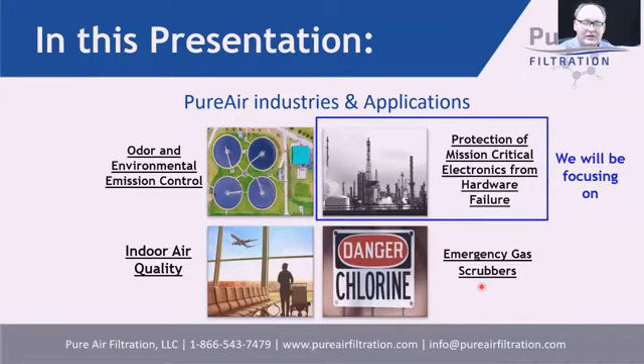I'll mention the other ones today: odor control and environmental emissions control. So this is mainly for wastewater treatment plants, but also for industrial or kitchen exhaust, preventing odors and gases from escaping areas, either for reducing complaints from neighbors or for environmental compliance.

Indoor air quality, that's protecting the air inside of buildings from gaseous contaminants. Typically airports, museums, where we're protecting precious works of art, and other applications, even just office buildings where you're looking to improve your air quality for personnel inside.

The last area I'll just generally mention is emergency gas scrubbers. So in this case, we provide standby systems, very, very low maintenance standby systems, which activate in the case of an emergency gas release and capture that gas and protect people and equipment from that. But today we're going to be speaking about protection of mission critical electronics from hardware failure. So let's jump right into that.

So one of our mottos here is Pure Air is a world leader in the removal of gases, odors, and vapors. And how do we do that? We do that through a technology referred to as gas phase filtration.

Everybody's hearing a lot of talk these days about filtration in regard to the whole COVID crisis. If you didn't know what a HEPA filter was before, you certainly know what it is now. And so filtration is certainly getting a lot of focus, and we're certainly enjoying a lot of that general focus on filtration, though we don't necessarily have specific things for viral control, at least yet. We do think that's something coming out soon.

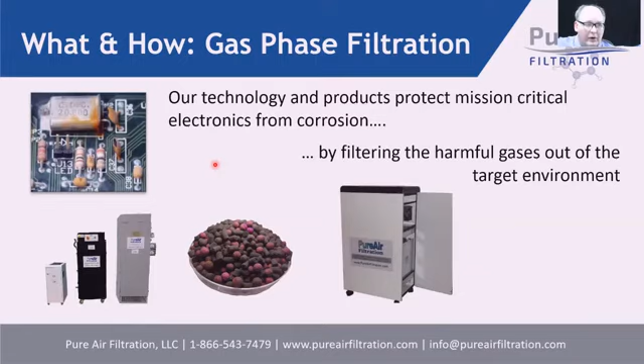So in regard to gas phase filtration, our technology and products protect mission critical electronics from corrosion. This corrosion, as you can see in this photograph here, can be very harmful. Especially as electronics become smaller and smaller and our dependency on electronics becomes more and more critical, these types of issues can cause really big problems.

Industrial facilities, wastewater treatment plants, data centers, all have very, very critical electronics, and even the smallest electronic failure can cause some really huge headaches in any of these facilities. So we work on filtering out those harmful gases to prevent these issues from occurring. This corrosion is typically caused by some type of harmful gas, and we'll discuss some of those gases and what we do for that.

So in regard to filtration, I mentioned HEPA filtration. It's got a lot of attention here. HEPA filtration is really great at removing dust and smoke, and to some extent bacteria, and there's some discussion about viruses, probably not capturing actual viruses, but at least capturing the droplets that viruses are in. So if we're talking about filtration of dust and smoke, the size of those particles is typically 0.03 to 100 microns.

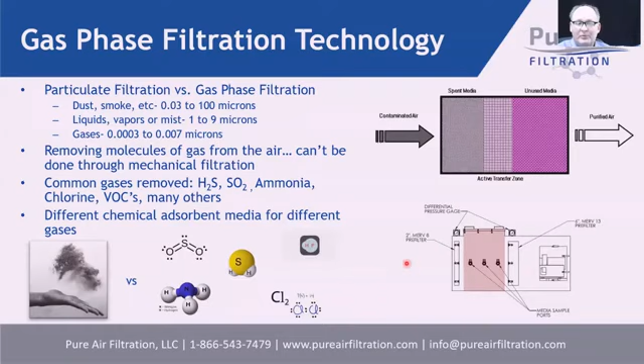And so we're removing these molecules of gas from the air. It can't be done through mechanical filtration. Some of the gases we're talking about: hydrogen sulfide, sulfur dioxide, ammonia, chlorine, volatile organics. We use a technology referred to as gas phase filtration or chemical adsorbents. We use adsorbent media to take these gases out.

So here's an illustration of how this looks. Basically, we pass gas through an adsorbent media. We'll get a little more detail of this. This adsorbent media captures these gases, and purified air comes out the back end of it. So the key is these adsorbent media that we produce here in Atlanta. We produce different types. And this is an illustration of one type of a system and configuration that might be used in some of these cases.

So how does this technology work? Well, we focus on the principles of adsorption and chemisorption. So to help explain that, there are two words up here that look very, very similar. There's absorption with a B, and there's adsorption with a D. They are two very similar concepts, but I want to mention to you that we're focusing on adsorption. And adsorption is when molecules are brought into an adsorbent and bound onto the inside of an adsorbent.

So it's a lot like a sponge, right? As water is pulled into a sponge, it's bound into that sponge and it's held in there. So our adsorbents are like little tiny sponges of sorts where the gases can go in, and they're bound inside of the adsorbent. And one very common adsorbent is activated carbon. I think a lot of people are very familiar with activated carbon. Maybe you have an activated carbon filter in your water filter, or maybe you have activated carbon in a home air purifier.

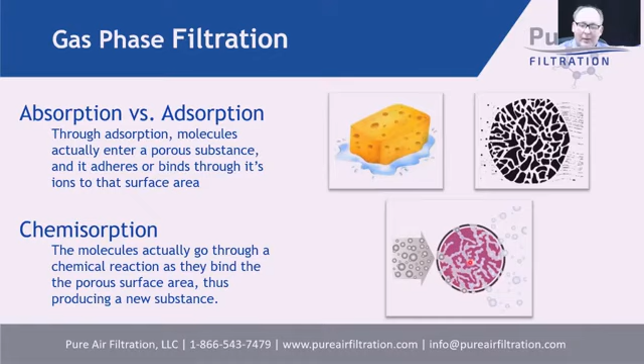The one disadvantage in regard to this is that chemisorbents, once they are fully consumed, cannot be regenerated. So plain activated carbon you might hear about can capture odors, and then you can send the activated carbon through a special process. Maybe you have to send it out to be processed, or maybe you've got the equipment on hand to go through a regeneration cycle where you can basically desorb all the gases out of the activated carbon and then reuse the activated carbon.

So there are some filters even in your automobile which do that, use activated carbon for capturing gasoline vapors and such. And so that can be a very useful function. For our customers that are expecting the high removal efficiencies, we use chemisorbents. When the chemisorbent is completely consumed, it needs to be replaced. So in this seminar, we're going to be talking about how we use that technology to protect mission critical electronics.

So industrial processing facilities such as pulp mills and petrochemical refineries produce various byproducts which can be harmful to electronics. In the pulp and paper mills, there's chemicals that are used to process especially the pulping area, which can be very, very detrimental to electronics. The high humidity in that environment is also important.

The same issue goes on with the petrochemical and refinery industry, where typically desulfurization of fuels is creating environments which can be corrosive to electronics, to the copper and the silver inside electronics. You can see a photo here of electronics which have been severely corroded. And I'll also mention to you that wastewater treatment plants, especially important for our water and wastewater sales representatives, are also a key.

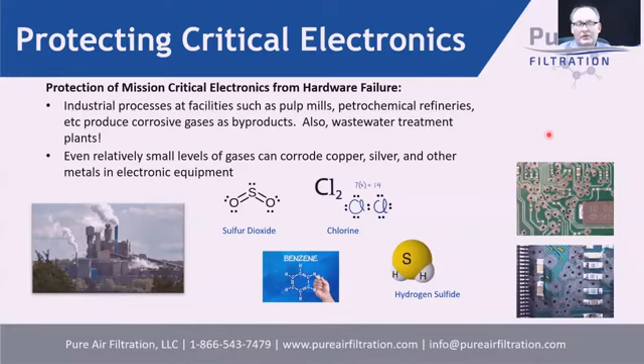And I'll mention to you, in prior years, there's been a push for what's called the RoHS regulations, restriction of hazardous substances, where in the effort to remove lead and other hazardous substances from general use, most lead has been removed from a lot of solder in the electronics industry. Well, that lead provided some protection for electronics. And so now the lead-free solder is extremely susceptible to corrosion.

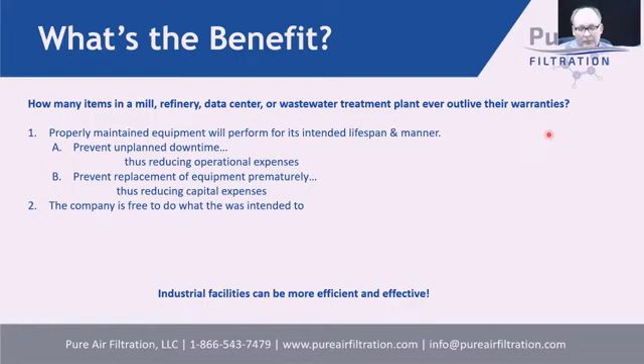And we've seen just a really huge increase in the amount of corrosion after the implementation of the RoHS standards to remove lead from electronics. So that's something where you may have seen an increase in the amount of failures of electronics after these RoHS regulations were put in place.

So how many items in a mill, refinery, data center, wastewater treatment plant ever outlive their warranties? So the key is, in many of these facilities, the electronics that are provided by big companies like Honeywell and such typically have a statement deep in the warranty which indicates that the environment has to be suitable to the electronics.

And so we have worked with a number of cases where manufacturers of electronics did not honor the warranty of electronics because they had huge failure rates at facilities. And when they looked into it, they found out that the environment was extremely corrosive to the electronics. And there was, of course, a big battle in regard to it, because the manufacturers claimed that the electronics weren't being properly protected.

So properly protecting electronics prevents unplanned downtime. It prevents replacement of equipment prematurely, and it allows manufacturers, paper mills, refineries, data centers to be free to do what they're intended to do, rather than tracking down electronic failures and dealing with loss in productivity.

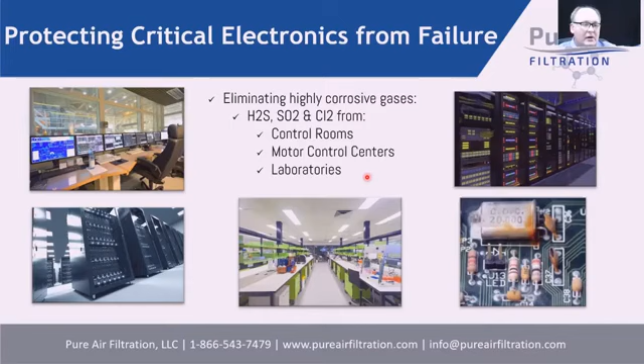Also laboratories, laboratories are very often, especially at a paper mill or a refinery, where we're checking various levels in the laboratory. They're often getting some hydrogen sulfide released in there, and we work with some customers that have some very, very expensive lab equipment, which fail very, very quickly. You know, we see some of this lab equipment easily costing $20,000, and they're replacing it every year because it's failing. So it's a simple solution to fix this and prevent that type of failure.

So there are lots of things to consider, and we're not going to go into any kind of detail about looking at the solution on how to solve the airflow, the air quality in an electronic environment. But these are just some of the areas that we take a look at. What is the type of contaminant and the level of contaminant of gas that's in there? Of course, that's one of the most important things to take a look at.

What kind of airflows, and do we need to take a look at the HVAC system in there? Temperature and humidity are really, really important factors to consider because they affect the rate of corrosion. We can take a look at pressurization or recirculation in order to solve the problem. Pressurization is a really nice thing to be able to have, but it's not always easy to do that. Typically, it's a much bigger project to install pressurization in the existing system. So we can very often rely on recirculation systems to solve the problem.

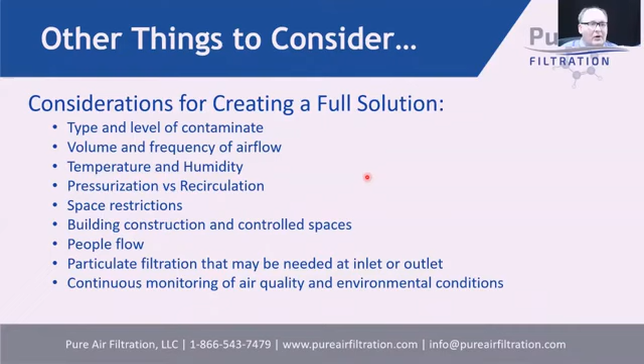Lots of issues with space restriction. Nobody has extra room sitting around to be able to take systems. So we very often have to put systems on top of roofs or up in ceilings or something. Important factors to consider: the building construction. Is it a well-sealed room or is it not? How often are people coming in and out of the room? How often are doors being opened? We also want to take a look at particulate filtration.

And once we get the system in place, how do we know that it's working properly? So keep in mind, our technology, we take invisible polluted air and we purify it, and out comes invisible purified air. So how do we know when the system's working and when the system needs to be maintained? So we'll discuss that here real briefly.

So the basis of this work is from the International Society for Automation. This used to be called the Instrument Society of America, and they renamed it years ago to the International Society for Automation. I sit on this committee, the ISA 71 committee. There's a standard that was written originally in 1985, and it was revised just slightly in 2013.

And this standard basically provides a method and 4 classifications for measuring your air quality. And it has a very simple test. The simple test basically provides for the use of a pure copper and a pure silver strip. Here's an example of what our test strip looks like. It's very often called a corrosion classification coupon.

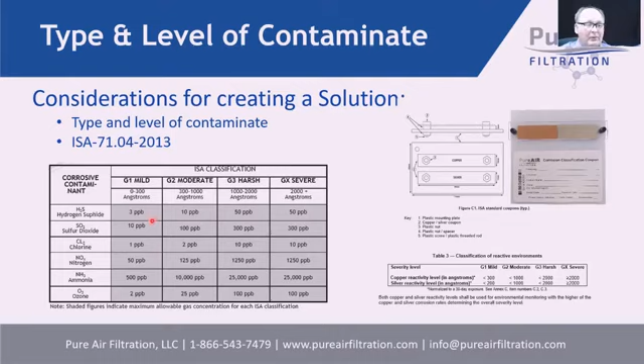All right, and the ISA standard comes up with these 4 categories. G1 is mild, and that's what we're targeting for. That's the least corrosive for electronics. And there's a G2, G3, and GX, which is severe. And these are some guidelines that the ISA standard gives for a general level of gases that might be in those areas. So the key I want to point out is hydrogen sulfide. This is one of the gases that we focus on the most. In order to maintain a G1 environment, we have to maintain 3 parts per billion of hydrogen sulfide. Look at, for chlorine, it's 1 part per billion.

So this is a real challenge, and this is why we have to use our chemisorbents rather than adsorbents, because if an adsorbent is occasionally releasing or desorbing a little bit of the gas that it captured, you're never going to be able to maintain 1 part per billion or 3 parts per billion. And so that's why our chemisorbents have to have this ultra efficiency and permanency to their work.

So here's an example of what one of these coupons looks like before and after. So as you can see, we have basically a mirror finish to the copper and to the silver prior to testing. And then afterwards, this is a coupon that comes back, and you can see the corrosion, the tarnishing, which occurred over that 30-day period. And I can assure you, this isn't the most severe that we ever see. This is probably a G3.

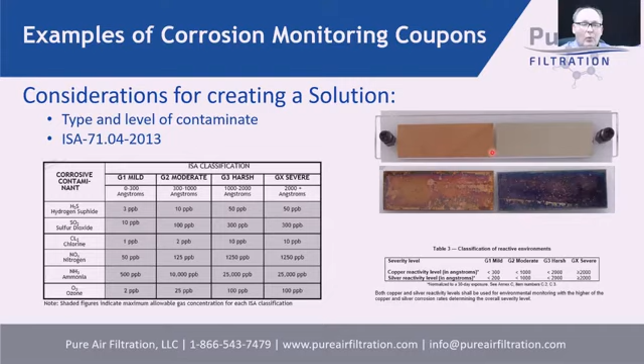Just by looking at it, with 20 years experience, I can kind of look at it and tell you that's about a G3 application. So it's certainly not a good environment, but it's not the worst of those. Sometimes they come back and these are just completely black. You can't even tell that they were copper or silver prior to that.

So this is a simple test. We provide these corrosion coupon testings to customers all over the world. It's a very simple test, very low cost, and allows the customer to get an idea of what's happening. Again, it's an invisible problem. We know that the corrosion is occurring, but we have to get a handle somehow on what's causing that problem and what level of problem it is. So we provide this coupon, we provide a report back, and then we can work with our customers to develop the right kind of solution for that.

So in regard to the standard, I'll also mention just a couple of things. I alluded to this earlier, but the control of temperature and humidity is really, really important, and is focused on in the standard as well. So while our systems don't necessarily control the temperature or humidity of the room, we're concentrating more on capturing the gaseous and to some extent the particulate contaminants in the air. It's very, very important that we also are taking a look at humidity control and temperature control, because any humidity above 50% is really creating a problem, and it basically accentuates the problem with the gaseous contaminants.

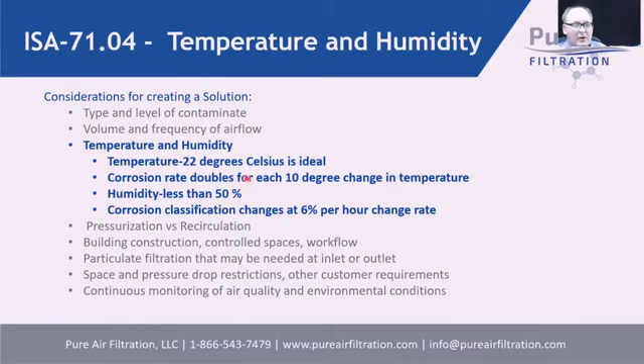So to give you an idea on why that's the case, hydrogen sulfide itself is somewhat corrosive, but the real problem occurs when a hydrogen sulfide molecule combines with a water molecule and turns into sulfuric acid, and that sulfuric acid comes down onto the electronics and causes the corrosion. So if we can control the amount of humidity, the water molecules that are in the air, then we can control the amount of sulfuric acid that is created, and we can reduce the corrosion.

So we want to keep that humidity level below 50%. It reduces the potential for corrosion. And of course, we want to get rid of as much gas as possible.

And also, going back to your chemistry days, any increase in temperature increases a chemical reaction. That's what corrosion is. It's a chemical reaction. So if we can keep that temperature reduced, and that typically involves dehumidification as well. Temperature control and humidity control are related. But if we can keep that under control, then we can reduce the corrosion.

Also, the standard does discuss pressurization versus recirculation. And pressurization is a great thing to be able to have. The standard is typically recommending pressurizing the room with purified air. So typically taking the outside air, purifying it with a PureAir system, sending it into the HVAC system to cool and dehumidify it, and then pressurizing the room with just a slight amount of pressurization, anywhere from 0.05 inches of water column to 0.1 inches of water column. So that's just 12 to 25 pascals.

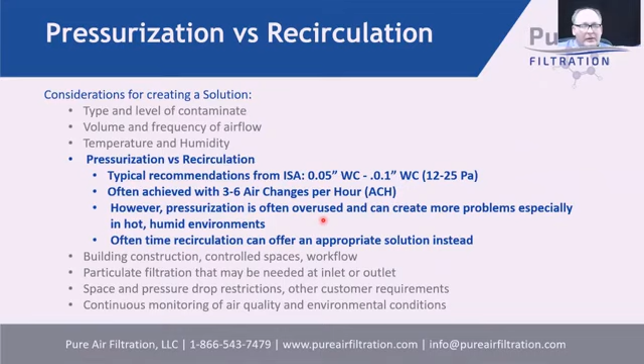If you can't have pressurization because you have an existing building and the HVAC system won't take the additional load, then we can very often take care of the problem with just some pretty heavy-duty recirculation systems. So we have a lot of systems that can just be placed into the room and just recirculate the air over and over and over again.

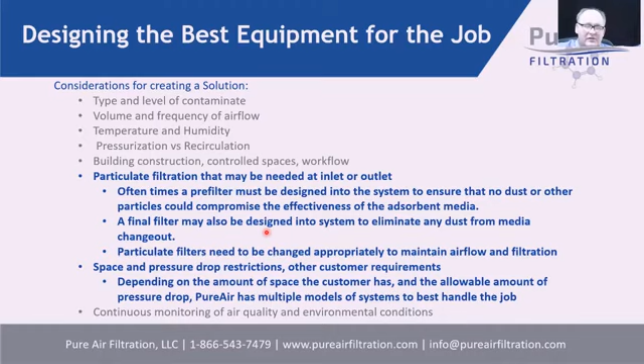Sometimes it's hard to get to exactly a G1 with recirculation, but we can certainly make some huge improvements. Maybe taking a GX to a G2, maybe to a G1, just depending on the application there, but certainly making some huge improvements in the corrosive nature of the environment there.

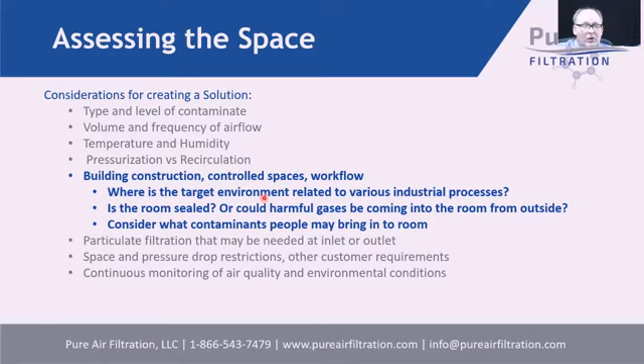Just a little more information, particulate filtration is important as well. You don't want all that dust collecting inside of your electronics. Our systems typically do have very high efficiency dust filters in them as well. So we do take care of that dust filtration at the same time, though that's really just an accessory. The main focus is really on the gas adsorption.

We're also working with our customers to understand the construction, more understanding about the room itself. Every room that we work with is different. It might be a very well sealed up room. It might be a very porous construction. And so typically a well sealed room can be more easily fixed than a room that isn't very well sealed. And we also provide sealing services for rooms in many cases.

So this would be basically a 3-foot or a 1 meter deep bed of adsorbent, and that's a traditional, very, very heavy-duty solution. Certainly the choice technology for a GX environment, going to have a long-lasting, really high-efficiency system, but these are very expensive systems and very large systems as well.

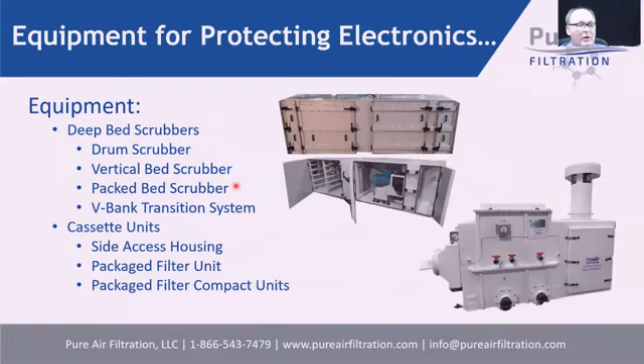These cassettes are pre-filled with the adsorbent media, and they don't have quite the efficiency of a deep bed system, but you can have multiple sets of these cassettes in series, and they provide the level of efficiency needed based on the number of cassettes. So typically we have two types of cassettes. We have a PP18, a PP12, and typically a PP18 is a medium duty cassette.

It can improve your air 1 G level, and a PP12 can improve it 2 levels. So if you need to make 3 improvements, then you might have to have 2 or 3 passes of these cassettes in order to get to that area.

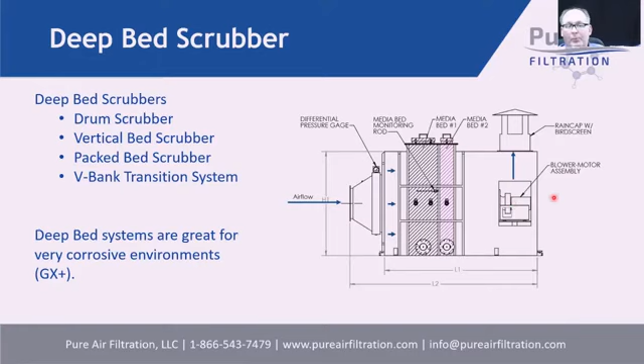So again, going back to deep bed systems, this is kind of what this deep bed system looks like. We can actually have multiple adsorbent medias. If you have multiple gas types that have to be removed, we might have to provide multiple adsorbent media types. So that's an example of the deep bed system.

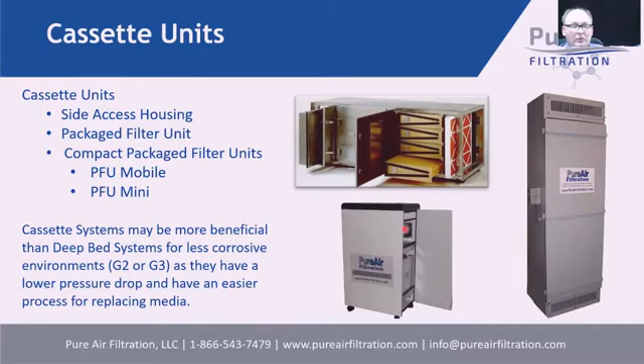Blower on this side. Typically we're drawing the air through the system and then purifying it with 1 or 2 different media types and then exhausting it out. In this case, this is a deep bed system for odor control where we're exhausting to the environment. For protecting electronics, we would typically be pushing that air in to pressurize a room space.

Also, recirculation systems. These are a couple examples of a small recirculation system. This is our PFU Mini. This is a small roll-in-the-room unit in case you've got a problem that needs to be addressed right now. This is basically an off-the-shelf unit that you can roll into the room to provide some immediate remediation of the problem. And then we have some larger systems that can fit into the corner of the room and provide a lot of recirculation as well.

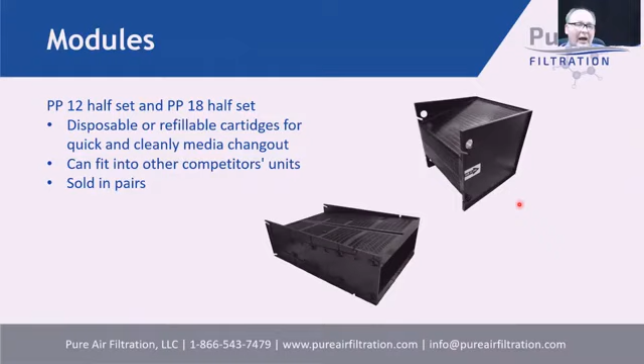So this is what a typical recirculation system might look like inside of a control room. Here's the PP18 cassette and the PP12 cassette. So this is what would be referred to as a medium duty cassette and a heavy duty cassette. So typically improvement of at least 1 G level here, improvement of about 2 G levels there.

Again, cassettes are not going to last as long as a deep bed system will, but they do operate at a much higher velocity. And so they allow you to shrink the size of the unit, shrink your initial capital outlay as well. So really great solutions for cassettes as long as they're configured properly.

And basically these just have a longer life. The PureAir 12 is basically 3 times longer in life than the PureAir 4. So there's some really great advantages for customers, especially in these cassettes where you have less adsorbent media in the system. If it lasts longer, then it's a really great benefit.

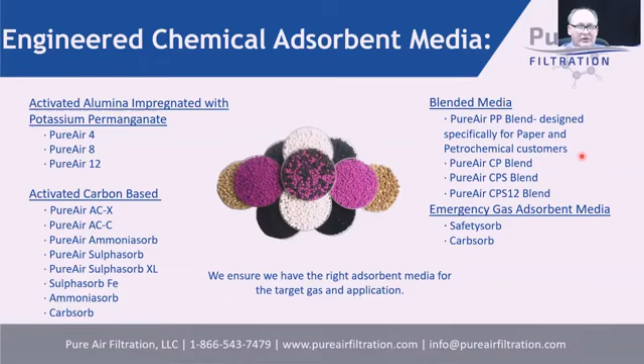Lots of carbon-based adsorbents. We do use some plain activated carbon for some applications where some volatile organics might be used. That's where activated carbon itself works very well. We have a catalytic carbon with a capacity for hydrogen sulfide of 66% by weight. It's like a hydrogen sulfide sponge. Some other products: a low cost hydrogen sulfide scavenger, our Sulphasorb Fe, and we also provide a lot of blended products.

For protecting electronics, I can tell you that the product that is typically going to be working the best overall for most customers is our PP blend. This is a combination of our Sulphasorb media and our PureAir 8 media. It's a multifunctional product which captures basically all of the corrosive gas families. And so if you don't know exactly what gases you have, use PP blend and it'll take care of the issue. It's our default for all of our protecting electronics applications.

Now, the key is, as I mentioned to you earlier, we work in a very unusual industry where we take an invisible pollution and we purify it, and out comes invisible purified air.

So how do we know whether it's working or not? Well, we talked about the coupon. So just as you can use this corrosion classification coupon to identify the level of problem that you have, you can also use this to monitor your system long term. So periodically you can put a new coupon in place and just check to make sure everything's going okay.

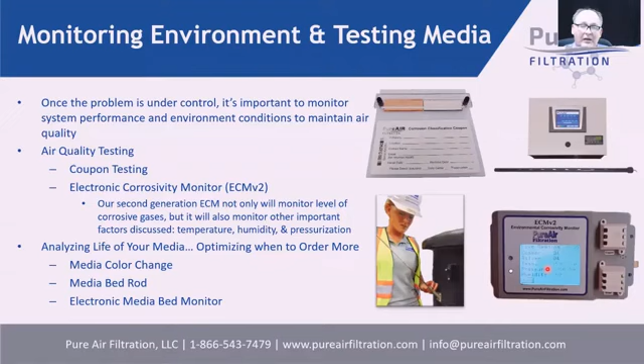I'll mention too, the ECM sensors are sacrificial sensors. We don't recommend putting the ECM into a space until it's protected, because these sensors will corrode quickly in a GX type environment, and they will expire. Typically these sensors will last for a year or more in a G1 environment. So we recommend using the coupons to get your space under control, and then implementing the ECM V2 when your space is under control, to make sure that it continues to be in control.